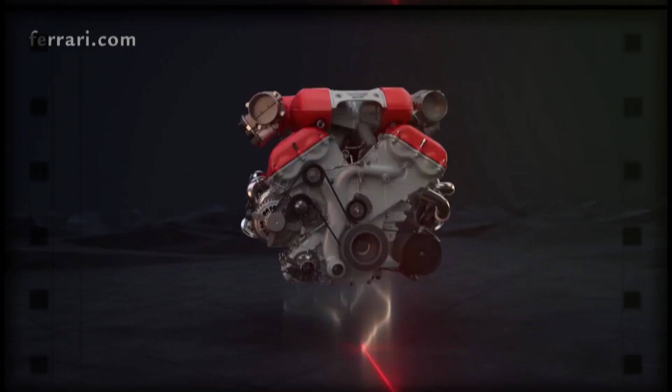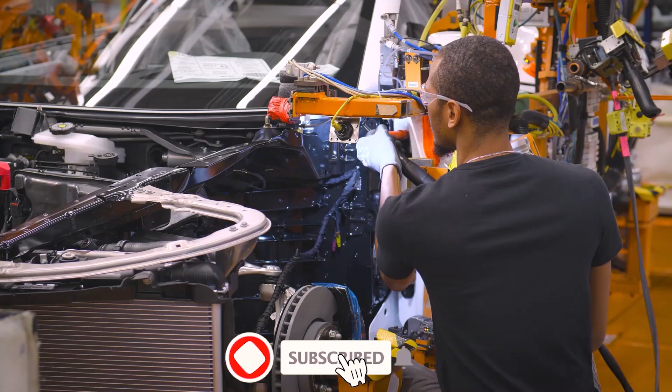In this video, you'll find out exactly how Chevy managed to steal this design from Ferrari and what they did with it. Keep watching, because you'll never believe the kind of improvements Chevrolet added to this model after taking the engine off of Ferrari. The history behind the creation of the C8 Z06 is a messy one, with some looking down on the Chevy because of its origin story as a Ferrari engine, and others admiring the creativity that Chevrolet put into developing this car. At the end of this video, you'll know just what happened between the two brands, which will help you decide for yourself if the design of the C8 Z06 is daylight robbery or creative ingenuity.

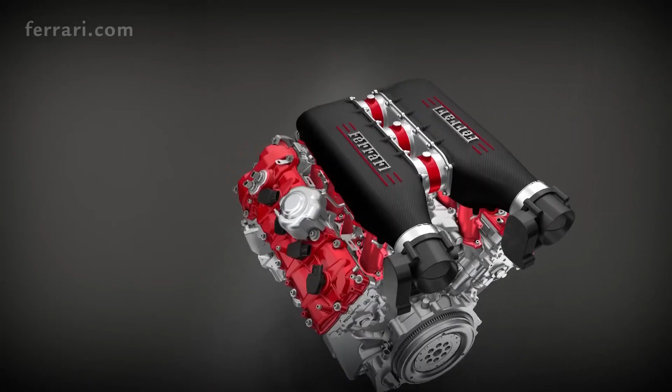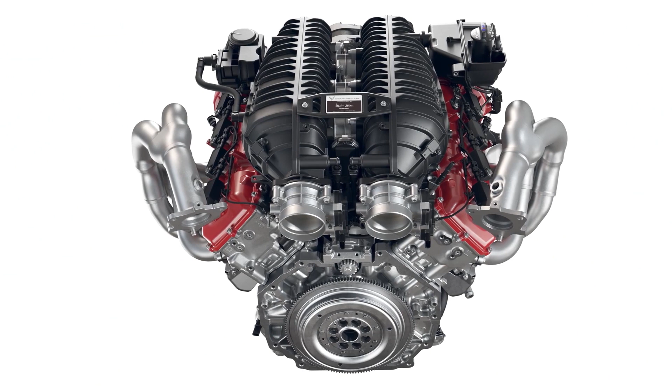The engine is where it all began. The exterior of the C8 Z06 may be a Chevy design, but the engine remains a classic Ferrari creation. The engine of the C8 comes from the Ferrari 458, which was used to create the LT6 engine. With a horsepower of 670 and an engine capacity of 5.5 liters, this flat-plane crank engine is one of the best in the market, so it's no wonder Chevy engineers wanted to get their oily little hands on it.

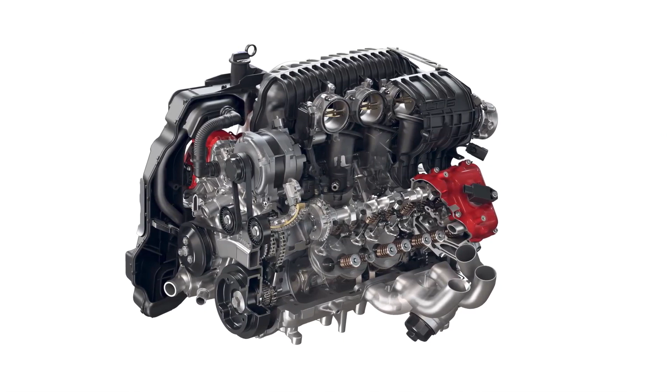The specs of this production engine make it perfect for the supercar that is the C8 Z06. Being a flat-plane crank engine also makes this car more responsive and compact. To top it all off, the design of the engine makes it spin a lot faster. But that's just the surface of all the cool stuff that lies both beneath and outside the C8 Z06.

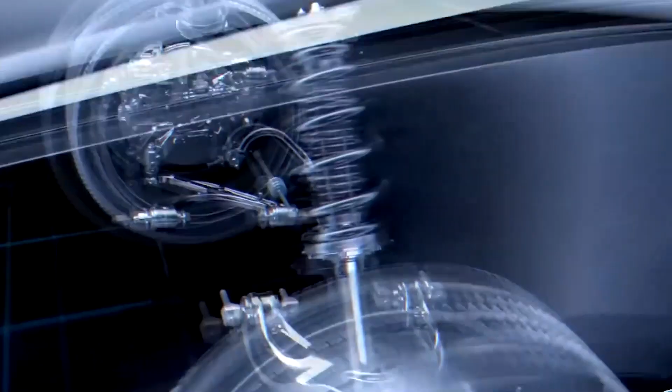The C8 has a sleek, wide-body design that adds to the overall vibe of the car. Its lightweight components allow it to glide across the track with a top speed of 189 miles per hour. The Chevy has a rear suspension design that is synonymous with the Corvette Stingray, but it hits 2,000 RPM higher than the Stingray. The rear wheels of the car are where most of its power is directed thanks to its balanced mid-engine design. The best part about this supercar is that it's super affordable, meaning you can rev with a Ferrari engine in an affordable Chevy design.

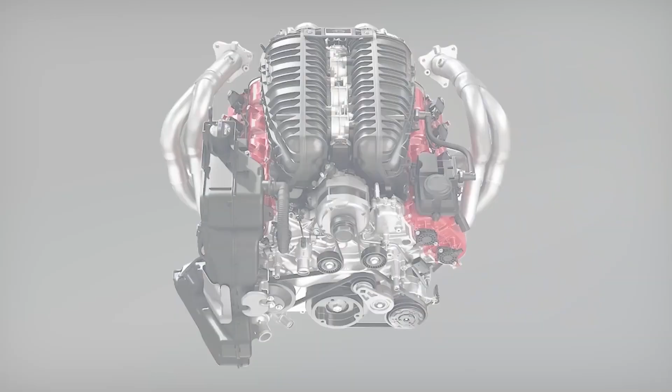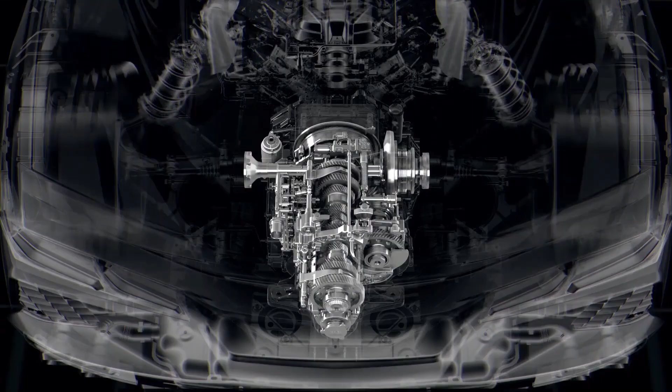The LT6 engine that powers the C8 is a force to be reckoned with on the track. It revs to 8,600 RPM and has twin 87mm single-bore throttle bodies. It also has an 8-speed dual-clutch transmission and over 100% in volumetric efficiency. It is arguably the most powerful 8-cylinder engine ever used in a production car.

This naturally aspirated engine also has titanium connecting rods, and it produces more horsepower than an LT2 engine even though it's slightly heavier. The LT6 manages to produce 670 horsepower, a solid 170 more horsepower than the LT2, yet it only weighs 1 kilogram more than the LT2. The specs on this engine are so impressive that they provide a unique and out-of-this-world driving experience.

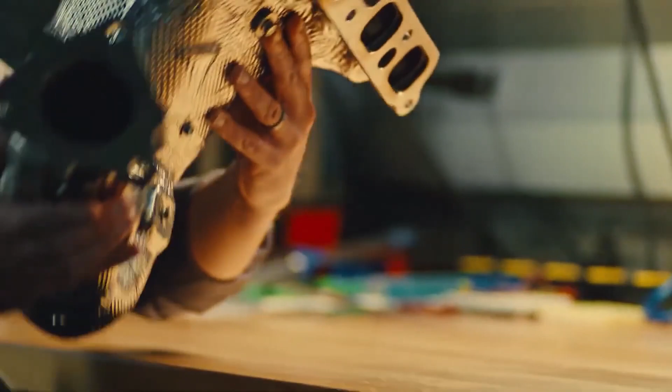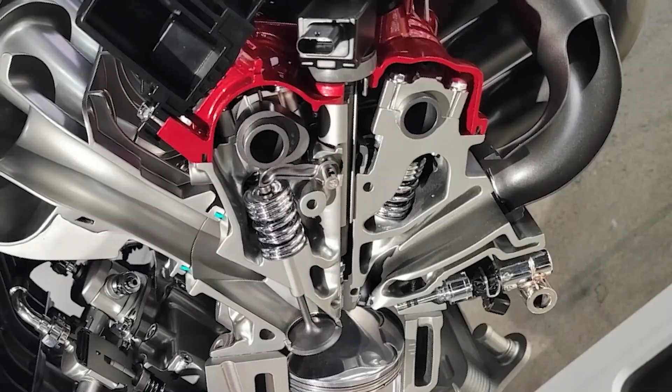Is the C8 Z06 an improvement? Well, the biggest argument around the C8 Z06 is whether the modifications made to the Ferrari engine and the car itself are an improvement to the original design or a downgrade. After examining the engine, there's no doubt that the modifications take the engine to a whole new level.

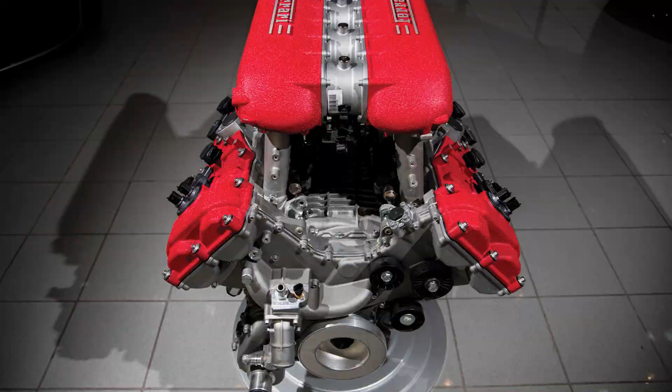Both the engine in the C8 Z06 and the Ferrari 458 have naturally aspirated flat-plane crank designs along with high revving features and mid-engine layouts. They also have dual-clutch automatic transmissions. The only difference is that the C8 is an 8-speed and the 458 is a 7-speed. Comparing the two engines closely will expose a few other differences that make the C8's modified engine superior.

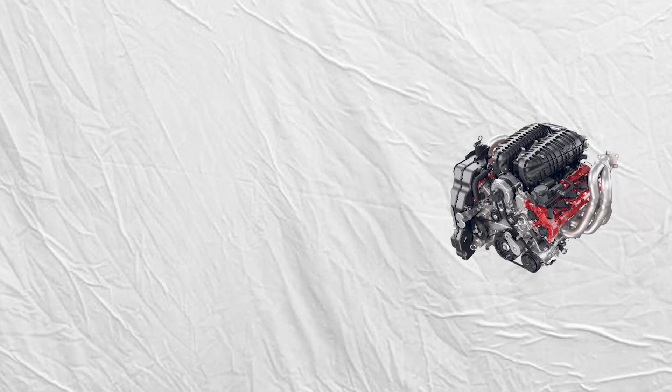First off is the increased horsepower. While the engine of the Ferrari 458 produces 562 horsepower, the C8 produces 670. The C8 engine also has a larger engine capacity of 5.5 liters compared to the 4.5 liters of the 458. Finally, there is the increased foot-pounds of torque, with the C8 having 460 and the 458 having 398. Where the C8 doesn't trump the 458 is in redline. The Ferrari engine has a redline of 9,000 RPM, which is more than the Chevy's 8,600 RPM redline.

How is the C8 Z06 different from other Z06s? After learning the origin story of the C8 Z06 LT6 engine, it's only natural to wonder what advantages this engine gives the C8 when compared to other Z06s, and what changes can be expected across the different Z06s and their varying engines.

Most Z06s have a few features in common, such as added stopping power and improved handling. The design of the Z06s are also quite similar, with most of them having similar bodywork and the popular aero design, going all the way back to the C5, which was one of the first Z06s.

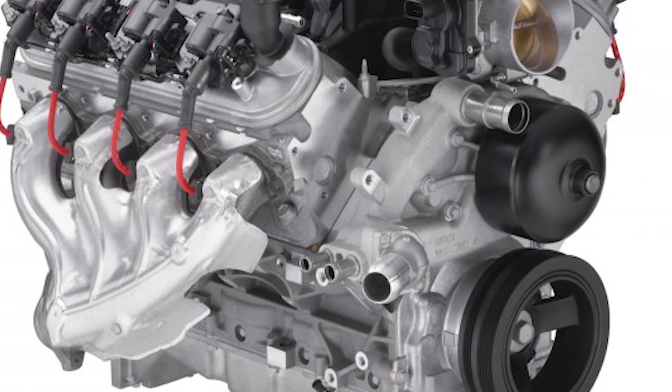But the design of the C5 wasn't its main attraction. The GM LS1 engine that sat under the hood of this car was what drew people in. This engine was a small block V8, all-aluminum, lightweight, 345 horsepower producing masterpiece with an engine capacity of 5.7 liters.

The power the LS1 produced, along with its unstoppable reliability, made it the engine to beat back then, and every Z06 since has been an incredible improvement.

The C8 falls into the category of incredible improvements with its LT6 engine, an engine that was first designed in 2014. Years ago, GM engineers looked upon the Z06 engines and decided that they could be improved, and that's exactly what they did. They created the LT6 and designed it specifically for the C8 Z06 after taking the initial design off the Ferrari 458.

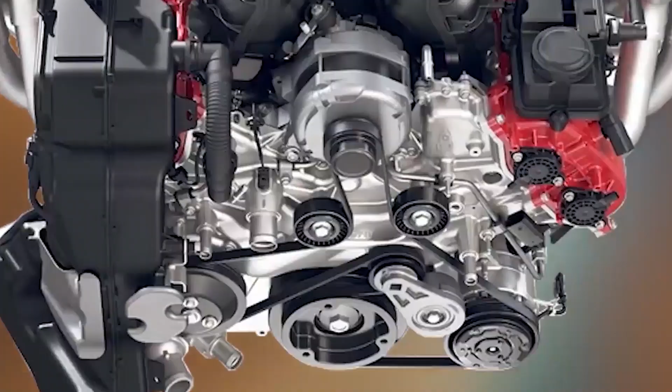When the engineers at GM first started development on the LT6 in 2014, they knew that they would need to produce something that could not only stand a chance in the ever-growing automotive industry, but also thrive. Their knowledge of this growth was why they decided to go mid-engine with the LT6, which expectedly created a few bumps on the track here and there, but also created new opportunities.

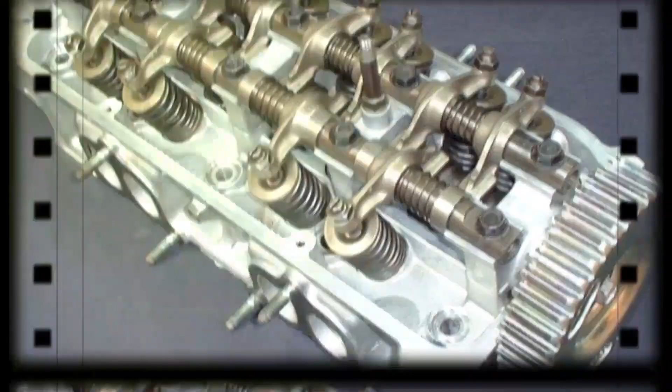One of these opportunities allowed GM to create the engine with overhead cams. In fact, the C8 Z06 had dual overhead cams. This veered away from the usual pushrod engine that was used in Corvettes.

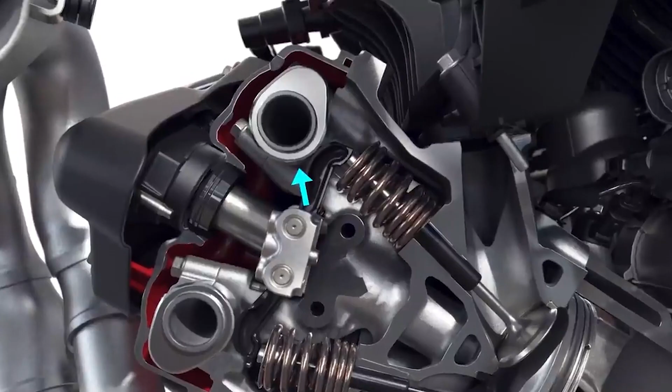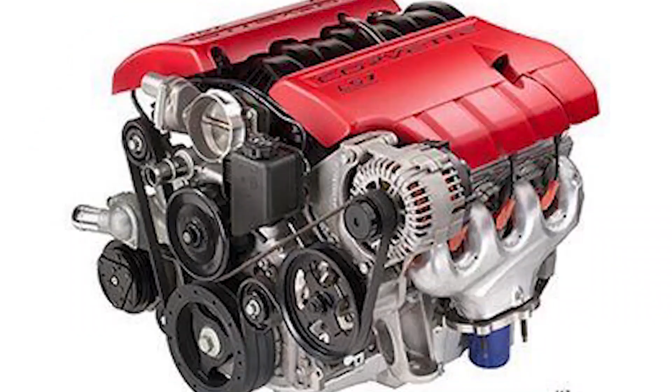While both pushrod and overhead cam engines have their advantages and disadvantages, the pushrod engine trumps the overhead cam engine in terms of mechanical simplicity and improved center of gravity. The improved center of gravity of the engines in the early Z06s is why they are known for having great handling. Another benefit of pushrod engines is that they produce large torque.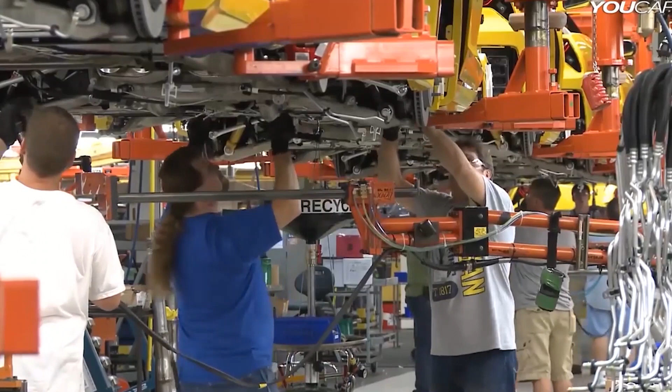The design of the overhead cam engine features one or more camshafts placed in the cylinder head on top of the combustion chamber. This design creates a need for more complex mechanical equipment and processes, which cancels out the mechanical simplicity used in pushrod engines, but also allows the overhead cam engine to spin at a higher RPM.

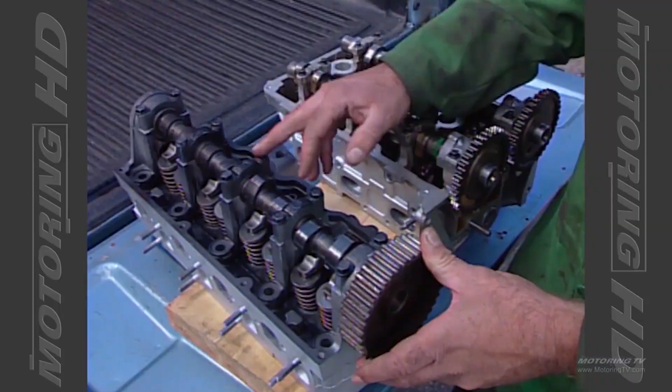Most pushrod engines can only spin up to about 6,500 RPM. Another way that an overhead cam engine is better than a pushrod engine is in terms of size and horsepower. Pushrod engines take up a lot of space under the hood, which makes it difficult for them to achieve the naturally aspirated horsepower that can be found in the LT6 overhead cam engine.

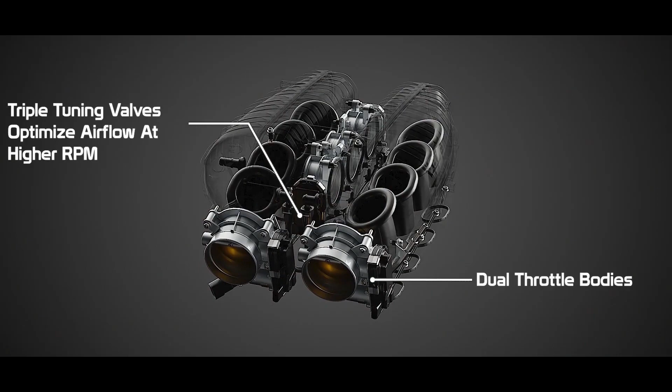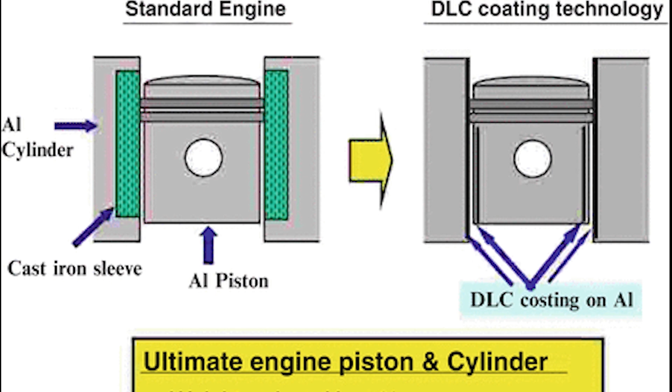The dual overhead cams in the LT6 also contribute to the engine output because it allows more air to move through it. The friction surfaces of the LT6 are coated in DLC, also known as diamond-like carbon. This lowers the friction in the engine and increases durability. The LT6 doesn't have hydraulic lifters because it utilizes a mechanical finger-style valve train.

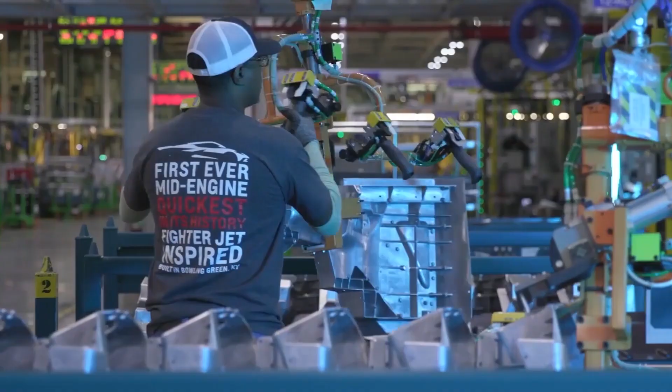The LT6 may have started out as a Ferrari engine, but it's safe to say that the modifications made by GM turned it into something far more incredible. They created an engine that defied expectations and placed it in a car that has an incredible design. Still, the fact remains that Chevy stole this engine from Ferrari.

So even with daylight robbery and creative ingenuity, how would you describe what Chevrolet did to the Ferrari engine?